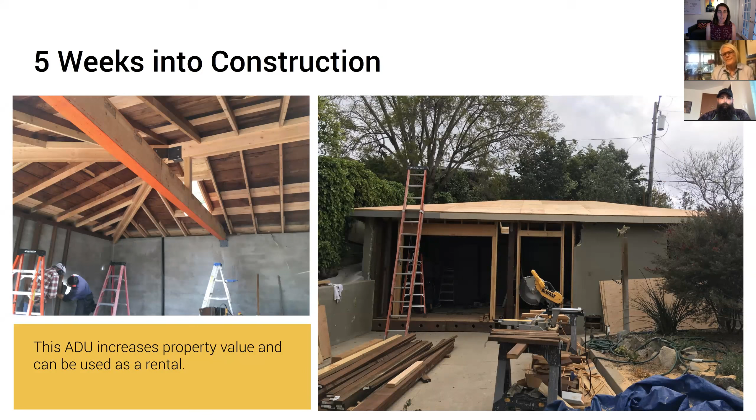This is my mom's garage, which has an attached guest quarters. Here's the before picture, looking like any old garage you'd never take a second glance at. Here's five weeks into construction, starting to take shape - we've busted out some of the wall, removed the garage door, and added structural beams to the inside. This project was especially challenging because the garage needed about $17,000 worth of waterproofing before we got started. Despite garages being the most cost-effective way to get a second unit on your property, there's still substantial costs that can go into these projects.

It looks so much better than my photograph - fantastic! We're really thrilled with the results of this project, honestly in shock and awe at how cool it really is. You would never know walking into it that this used to be a garage. So we're going to talk about some of the design features that went into this project in particular, and things you guys can incorporate into your own projects.

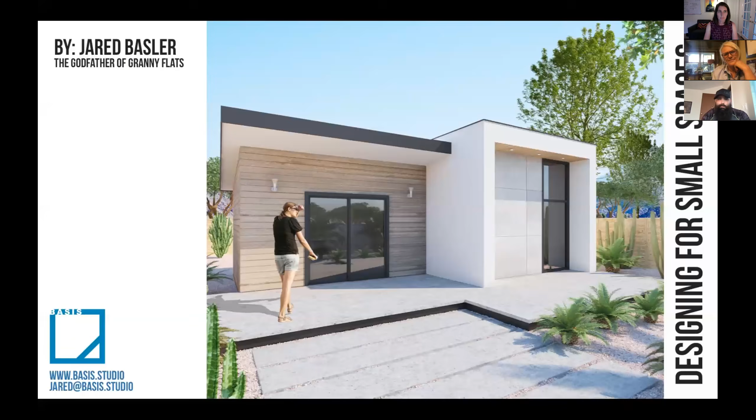As we get into designing for small spaces, that term is really general. I wouldn't necessarily consider your mom's project a small ADU. I've done down to 12 by 18. Got a 12 by 23 ADU here at my place in La Mesa. So it's kind of a relative term, designing for small spaces.

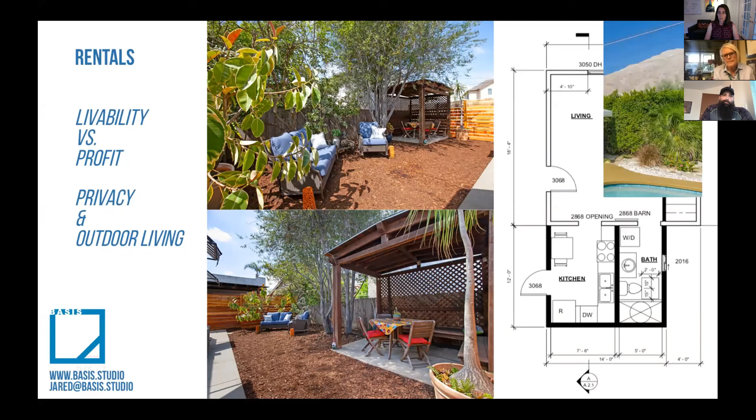So when we start talking about guest units and how we incorporate those into the property, this is where you can have a little bit more flexible spaces. We see a little bit more studios in guest units, simply because the spaces can be reconfigured as needed.

So the unit on the left is our kind of template design for City of San Diego. It's a 476 square foot studio that can be reconfigured into a 1-bedroom if necessary, but it's a nice contemporary unit. And then the one on the right is the first ADU that went through the city of Palm Springs.

This was a conversion with a couple of add-ons over the years, and it was designed as a guest unit that they could share with their friends and family. And so that's why it's more shared outdoor space, more trying to think about how you incorporate it into the primary.

And then for a unit that you're designing for yourself, this is where you get into making it the space for you, and designing for custom fabrication, built-ins, that kind of stuff that you can really take advantage of the space, while understanding that those are going to be limitations going forward.

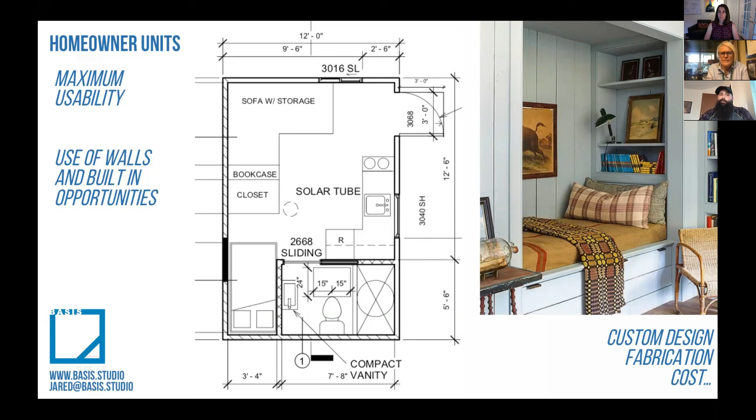Getting back to that original picture we were looking at, that nice little tiny home loft, let's talk about some of the limiting factors that we typically run into. And a lot of these are code issues.

The reason why there's so much insulation is because all new construction in California has to meet certain energy requirements called Title 24 regulations. These Title 24s weren't really designed with ADUs in mind, and so it can be harder for the small spaces to meet those requirements.

And those Title 24 regulations are changing in 2020, which is something that we put out in our newsletter recently, saying that if you want to avoid having to put solar in your ADU to meet those Title 24 requirements, you need to get your project started this year. It doesn't have to be built this year, but you need to get it into permitting this year.

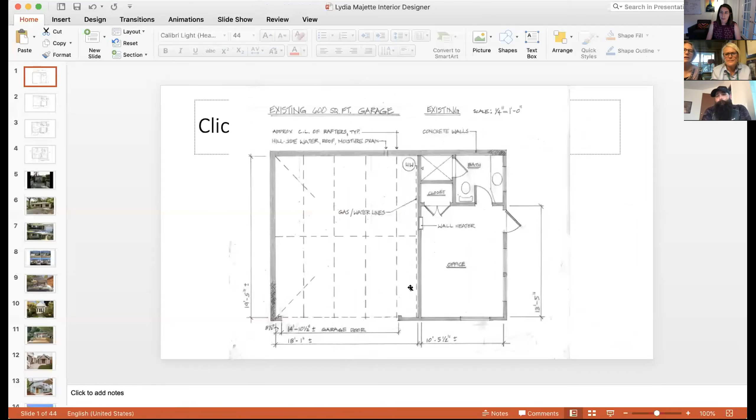Lydia is an interior designer. She's been an interior designer for over 22 years. When I was trying to figure out how I was going to intro her, we started talking about what's the difference between an interior decorator and an interior designer. And she said, oh no, don't call me a decorator. An interior decorator is someone who really just does finishes and furniture and whatnot, and they don't have to go through any formal training. They're probably not up to date on codes or ADA compliance, versus an interior designer who studies under an architect, goes to school for that, and can draft.

Lydia has been the interior designer helping work on my mom's project, whereas Jared was the ADU designer, the architect that worked on that project.

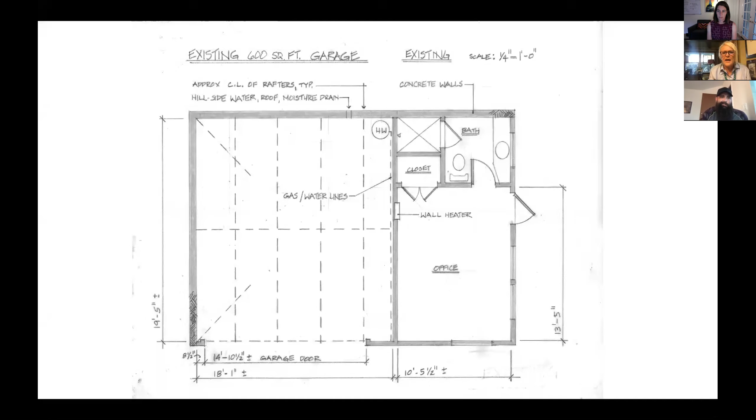So this was her existing 600 square foot garage. It had an existing small bedroom, bath, closet, kind of guest room, and Lynn had used it for her office for years and years. The left side was open garage, I think it was a 1.5 width garage. And that's what we started with.

So then we'll go to the next slide. As Jared was talking about, if your intent is just rental income, at least currently, just to have that extra income, I was showing how we could keep the existing wall that was there and add some additional storage closets for whomever might rent the property. My suggestion is to keep it as simple as possible. That's how I would approach it.

Doing this such that if down the road you decide you want to convert this to an in-laws quarters, or one of your grown children moves there, you don't have as many things to change. I would probably approach it, if my budget was slim, with off-the-shelf kitchen cabinets, basic refrigerator, stove, apartment kind of models that are easy to replace and not as costly. Or you could even buy a prefab kitchenette, which comes in linear feet, and they're cheaper to install. But then, of course, you would have a difference on replacement.

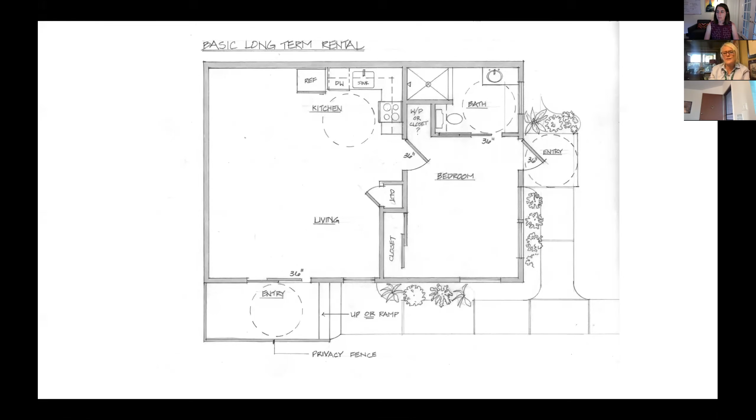Okay, so we're going to move to the next slide, which is the same footprint. This is basically showing how, if someone rented the previous model that just had the kitchen and bathroom done, they could furnish it like this, bringing in their own tables, sofas, whatever. I just wanted you to get a sense of how much fits into a 600 square foot space.

This is pretty big for... Caitlin, I can't remember what the limitations on the square footage are for dwellings here in San Diego. Yeah, it's dependent on your jurisdiction. Every jurisdiction has their own rules and regulations about the max square footage you can build. In San Diego it's 1,200 square feet. In Los Angeles it's 1,200 square feet. In San Jose it's up to 900 square feet, and it's dependent on how large your lot is.

So if you're curious about how large you can build, you can go to maxablespace.com, and we have a regulations portal with all the rules and regulations listed out for various jurisdictions in California.

So that's great. This could be what someone could do if they rented the space, so they can really have a kitchen and a work area, a table work area combination, a sitting area, a bedroom, and a full bath, and even a location for a washer dryer stackable unit if the homeowner or renter wanted, plus enough storage to hopefully cover their needs.

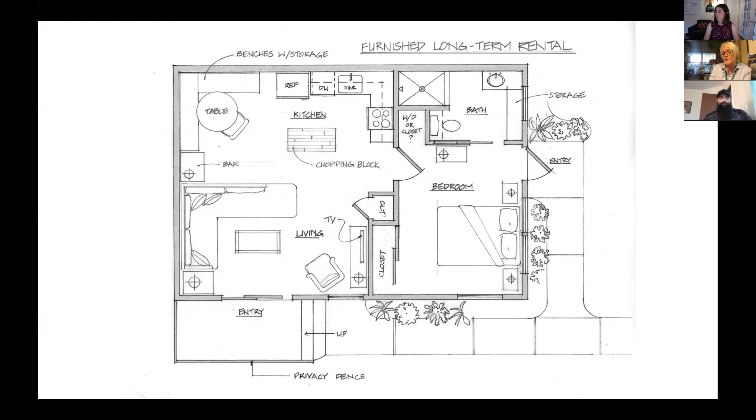And then the homeowner might say, well, I might furnish it and rent it out, which could be long-term or short-term. This could also just be a representation of how the homeowner might do it as a furnished unit. Okay, and then the next slide is kind of more customization.

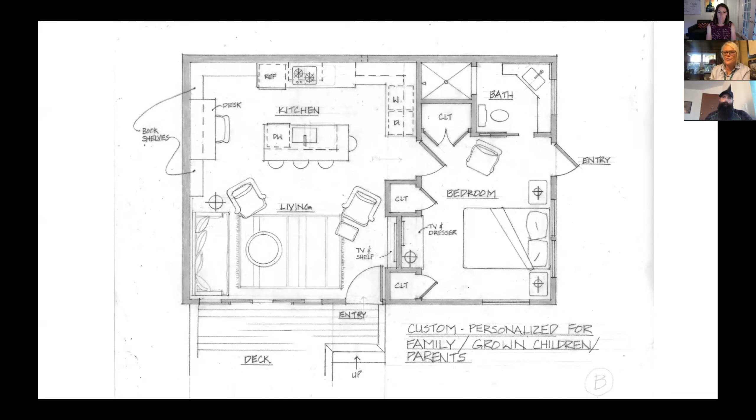So if the client needs it for their personal use, maybe their kids are going to be coming in and out and staying there, or they're going to have guests. This is just showing a little more custom built-ins, like a larger kitchen with more custom cabinet sizes, a built-in work area with tons of storage, and built-ins in the bedroom. All the built-ins start costing more money, but they help with space saving, giving more floor space and not so much furniture use. So that's kind of what this slide represents.

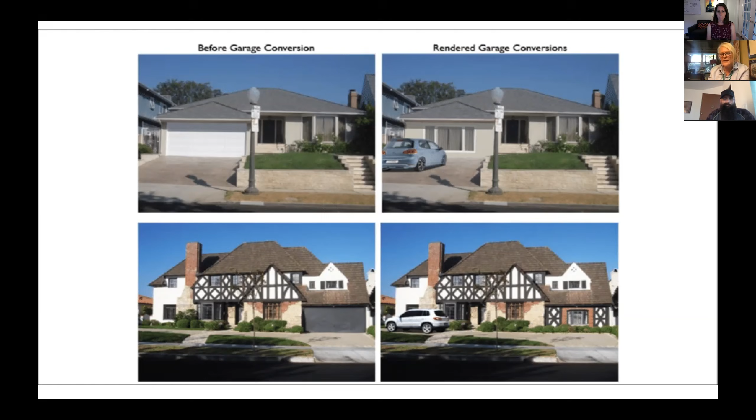And I think that's one of the things I love about my mom's garage conversion so much, is that you really can't tell it used to be a garage—adding the deck and then taking some of the architectural design elements from the rest of the house and incorporating that.

One of Lydia's ideas was to do a pop of color on the doors, a deep red. She painted not just the accessory dwelling unit doors that color, but all the exterior doors to the main house, so it creates cohesiveness and makes you feel it was always designed that way. I think that's the goal, because you want your neighbors to be happy about your garage conversion, and if you're renting it, you want the renters to feel they have their own space and privacy, that it feels nice for everyone.

So these next slides we're going to go through quickly, just examples of either connected or detached garages that have been converted, and how they've incorporated the home. My taste is to make the home and the garage as related as possible. That's just my sensibility. I like that it feels connected, or related.

So without further ado, I want to jump into the Q&A portion of this. We've had a lot of questions come in, and I'm going to read some of them out loud here. Let's see where all the questions are. Okay, so we'll start with, again, we have more questions coming in, so we'll try to get to as many as we can. So first question, do decks and stairs count in the square footage?

This is something that is city dependent. Every city has something different that they count towards area that you're able to develop. In the city of San Diego, it's called floor area ratio, or FAR. And it all depends on how covered it is. If it's covered on more than 3 sides, then it's counted in your floor area ratio, and that's something that counts towards the max you can build on a lot. As far as the square footage of the unit, I haven't seen any cities that actually count decks or exterior stairs as part of the unit. The only issue becomes when you have enclosed stairs, it has to count towards something. So we've had ADUs that are built off of a garage, and we've been able to incorporate the stairwell into the upstairs unit as part of the garage occupancy rather than as part of the unit. That kind of has helped us build a bigger unit upstairs. But it all comes down to individual city regulations.

Great. Yeah, essentially if it's enclosed, generally it'll be counted, with those 3 walls, generally it's going to be counted towards your floor area or your square footage. But if it's just an open outdoor thing, like a patio or a deck, it's not going to be counted towards the square footage. The other thing really quick is that decks are also restricted in a lot of cities in areas where you might be able to build an ADU. So you might be able to build an ADU in the setbacks in certain cities, but a lot of times you can't build a deck in the setbacks.